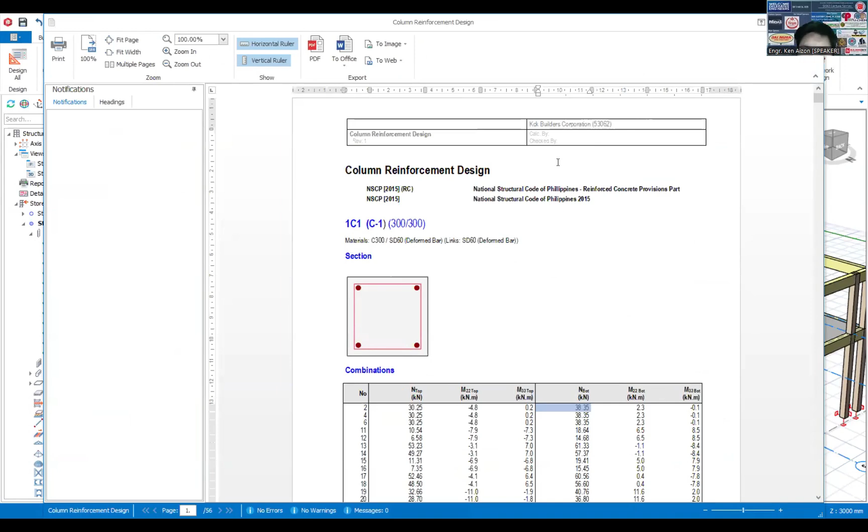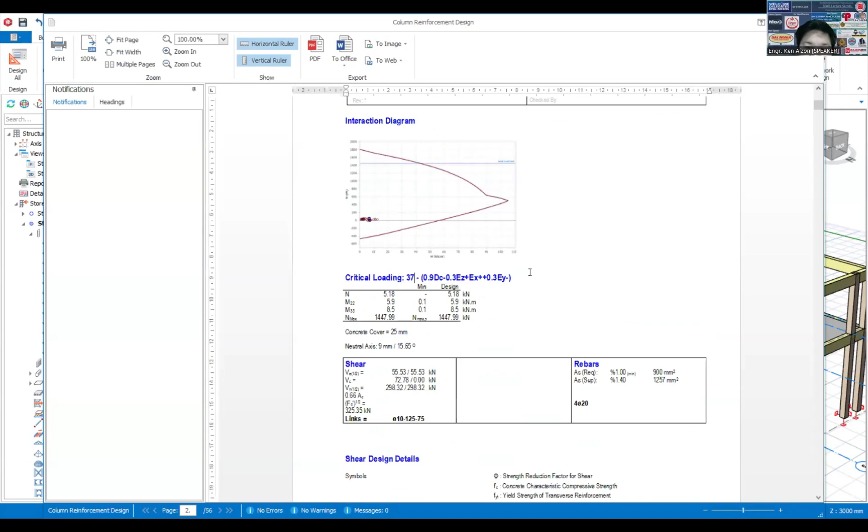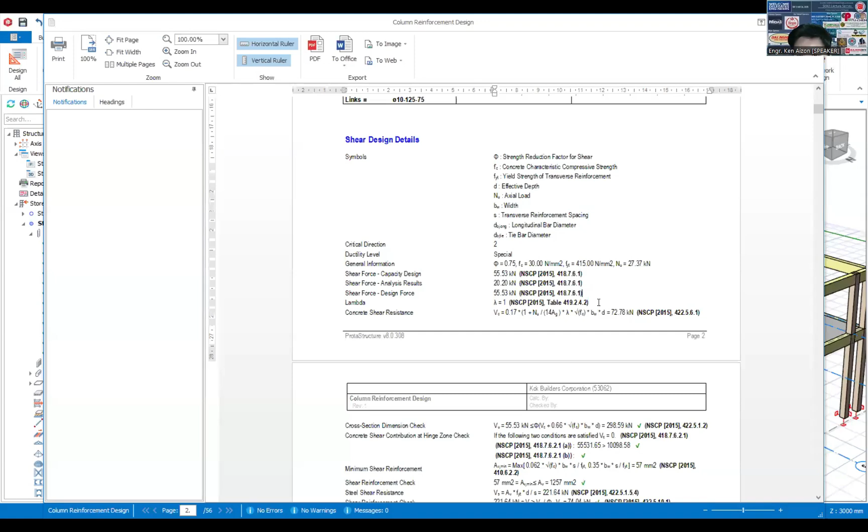So may interaction diagram tayo. So the critical load is load 37. So ito yung result niya. So as you can see, NSCP 2015 418. So it is on seismic detailing. So naglalagay siya ng seismic detailing sa iyong design. So ito may fail siya, dito. So actually we can solve this.

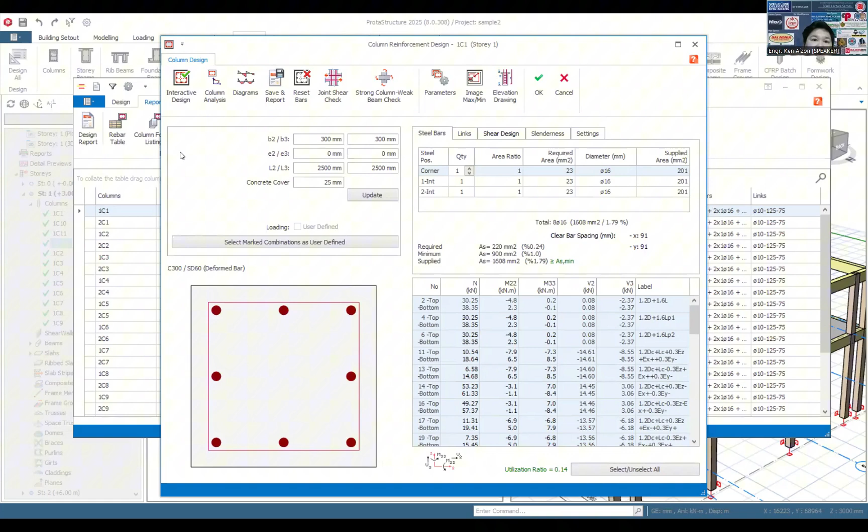Pero si Prota Structure pwede mo siyang i-connect sa Idea Statica. So ang principle kasi ng steel design for the detailing is kung ano lang yung available library niya, yun lang din yung angkop sa design mo. So if you're using Idea Statica, mas marami siyang library for specific template for your design.